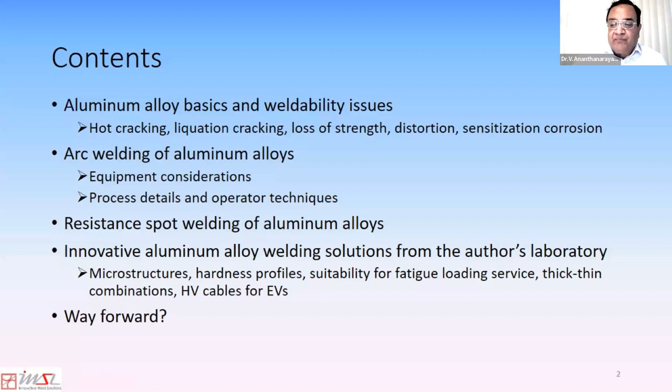So coming to aluminum alloy basics - aluminum alloys are grouped under 8 different alloy groups, and usually they are designated by a 4-digit alloy group number. Alloy groups with 1XXX are unalloyed aluminum with greater than 99% purity.

2000 series alloys have copper as the main alloying element, and they are heat treatable to high strengths. The 2000 series alloys are mainly used by the aerospace industry. 3000 series alloys have manganese as the main alloying element. 4000 series alloys are used mainly as filler material and have a fair amount of silicon in them that makes them low melting.

5000 series alloys have magnesium as the main alloying element. They're used extensively in the manufacture of aluminum boats and ships that go into the sea, since the alloys have good marine corrosion resistance except at the weld areas.

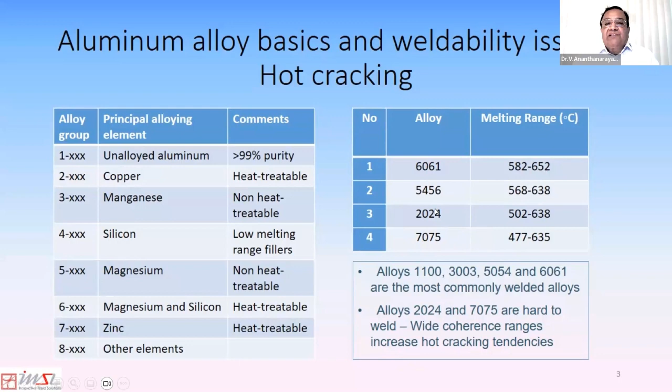And the higher the coherence range, the higher the tendency for hot cracking of a weld metal as it solidifies. That's one of the main reasons why these two alloys are not considered weldable.

If you look at efforts to spot weld these alloys using conventional methods that are used in the manufacture of, say, the Ford F-150 aluminum body, you can see that the 5000 series and 6000 series alloys give you very good buttons in a peel test of spot welded aluminum, whereas 7075 gives you some questionable buttons, and the breaks are mainly in the sheet metal.

And with a 2024 alloy sheet, you cannot even get a good peel test done. The separation is entirely along the interfacial interface of the weld. So this shows the effect of the coherence range on the weldability of these alloys and why folks don't like to spot weld the 7000 and 2000 series alloys.

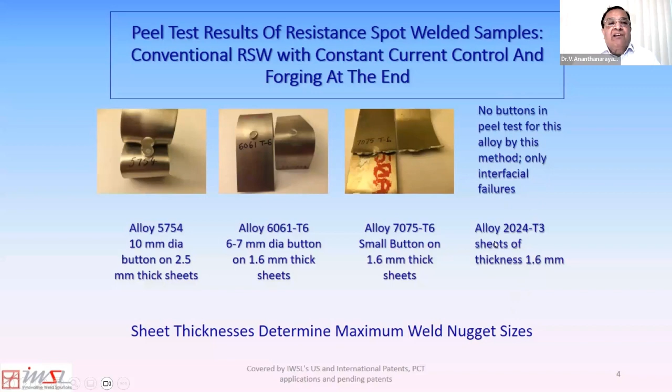Another problem with aluminum alloys is liquation cracking, which is the partial melting of a second phase in the heat affected zone of the alloy. And it's not tramp elements in the material that make this cracking happen, but alloying elements such as copper, silicon, and magnesium that are added in the alloy.

I will show you some micrographs later that show second phases of this alloy in the heat affected zone that melt during welding and cause this liquation cracking. Phases such as Mg2Si and Al6CuMg4 and other phases are the sources of such liquation cracking.

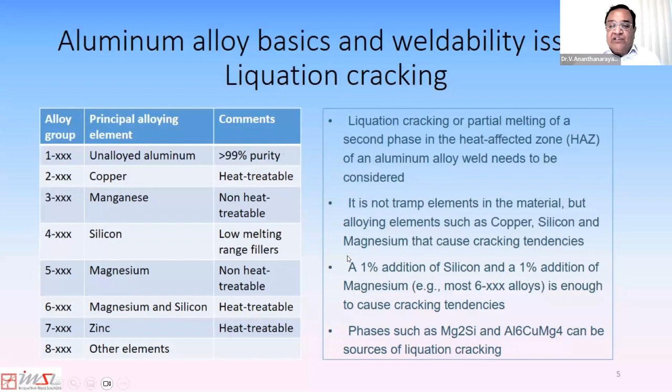What I show here is a micrograph of a resistance spot weld of a 5000 series alloy, where these magnesium-rich second phases have cracked due to the welding heat. They have actually melted and cracked during the welding and post-weld cooling operations.

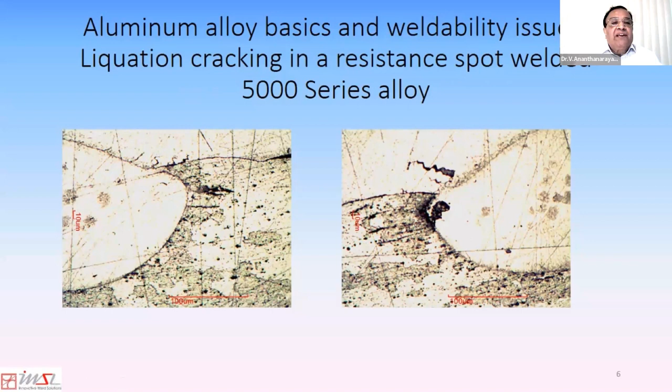So this kind of crack obviously makes the structure not suitable for service, and it's a problem when you weld these alloys which have second phases that can cause such heat affected zone liquation cracking.

Some of the potential solutions for this liquation cracking: if you are doing arc welding, you can use filler metal containing 5% or more magnesium that lowers the melting temperature of the filler metal and allows it to provide a feeder for already solidified regions, so they solidify without cracking.

Also, fillers with grain refiners such as zirconium can help as well. Edge preparation and root gap can also be done in such a way that sufficient filler metal feeding is enabled during the cooling of the weld post-welding. So these are some of the techniques folks use while trying to address this liquation cracking issue, but none of these work very well if you are spot welding this alloy, or if you're trying to resistance seam weld this alloy using conventional methods.

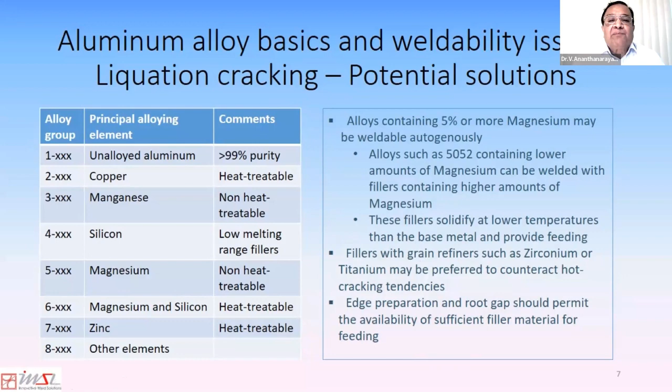The aluminum alloys also are subject to sensitization corrosion, particularly the 5000 series alloys, which happens due to the precipitation of magnesium aluminides in the heat affected zone parallel to the weld edge. There is a temperature range in the heat affected zone that is favorable for the formation of these magnesium aluminides parallel to the weld edge.

This is very similar to the intergranular corrosion of stainless steels that some of you may be familiar with, where the heat affected zone of a stainless steel, if it has higher carbon contents, or if the heat input is very large, tends to become susceptible to corrosion in the heat affected zone. So this is somewhat similar, and folks use low heat input and cooling of the heat affected zone.

But this is a serious problem in the welding of aluminum boats and ships that go into the sea. I have known some aluminum ships that go into the sea, come back to the dock every 2 or 3 years, just to gouge out these sensitization corroded lengths parallel to the weld, and then deposit new weld metal and go back to the sea.

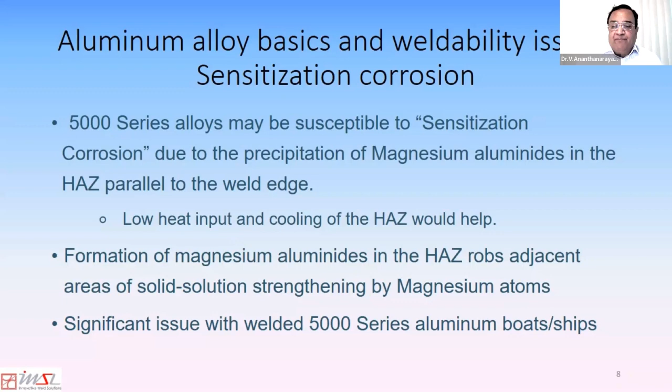Other issues with aluminum alloy weldability are a 50 to 70% loss of strength in the weld and heat affected zone areas. And if you weld a 6000 series alloy like 6061 T6, a 50 to 70% loss of strength in the heat affected zone is not uncommon.

And this is why the aluminum alloy structures have not gained widespread use in structural applications that involve cyclic loading and other heavy stressed mechanical loading applications. The loss of strength occurs even in non-heat treatable 5000 series alloys, as I mentioned. So the recovery, recrystallization, and grain growth rob strengthening effects from cold work as well.

And what can one do here? One can tack weld more to help with the distortions and assemble compressive stress if possible, so that the residual stresses are not so adversely affecting the application, and only make welds that are as big as needed, no bigger. If there's a thought process that larger welds can hold more load, that is a completely wrong idea with respect to aluminum.

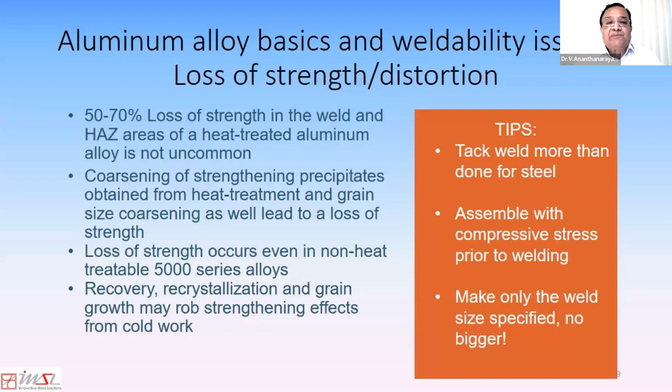Now I'll talk a little bit about the arc welding of aluminum alloys, and mention at the end of this talk some of the things we did while welding a door panel for an automotive application, the door panel made of aluminum. Initially, I'll just introduce some of the techniques used in the arc welding of aluminum.

All arc welders for aluminum need push-pull feeders because the alloy wires are soft. You cannot just push the wire into the weld gun conduit like you push a steel wire. You need a push-pull feeder, and the feeders are very close to the contact tip in these guns. And the conduits are also made of Teflon. So it's very necessary to keep the conduits in a smooth circle and not step on them, and handle these welding conduits and welding setups very gently when you're welding aluminum.

Secondly, the welding current waveforms and polarities play a significant role in both gas metal arc welding and gas tungsten arc welding of aluminum. And as you all know, aluminum has a very high affinity for oxygen.

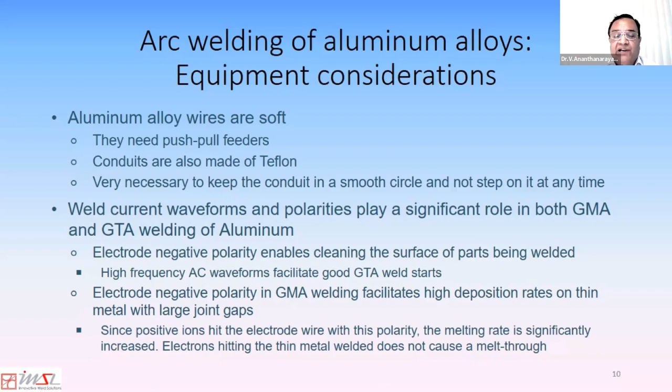So to understand the effects of these waveforms in aluminum alloy welding is very important. If you look at TIG welding, you can have balanced AC sine wave technologies at 60 hertz here, or in India, 50 hertz. The positive half cycle is cleaning, the negative half cycle is penetration. So with AC square wave technology, you can have more cleaning or more penetration as your joint geometry dictates.

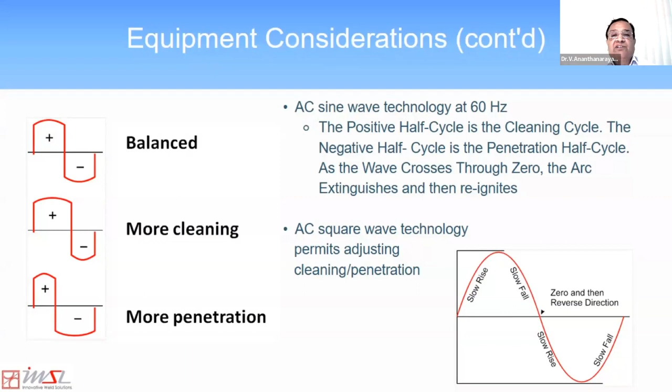Some of the arc welding waveforms are shown here. I'm not trying to recommend one manufacturer of weld equipment versus another. Many manufacturers like Lincoln and Hobart and others also have their own special waveforms for welding aluminum. What they commonly do is superimpose low frequency and high frequency pulses.

Current pulses are shown here. These are high current amplitude and low current amplitude pulses, with penetration and wetting occurring during the high current pulses and solidification during the low current pulses. Why do we need this?

One of the reasons is that aluminum is a very conducting metal. If you keep welding at a current that melts the initial start of the weld, by the time you travel a certain distance, the weld and the metal get too hot. There is a need to cycle low and high currents like this to maintain a constant weld width. You can adjust the duration of these depending on your part material thickness combination and joint geometry to get an acceptable weld bead that has uniform wetting and penetration along the length.

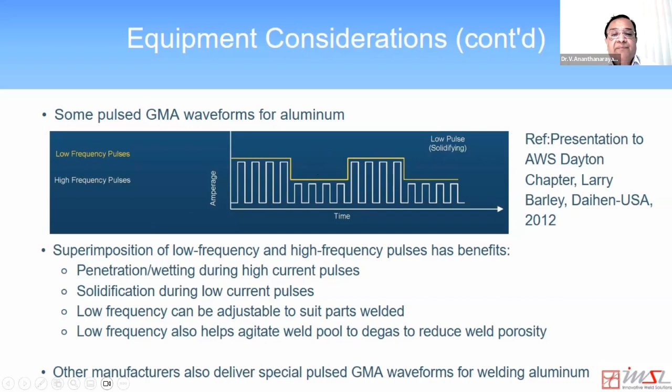This kind of imposition of low current and high current pulses is also done in the AC mode. It permits high deposition rates and is designed to weld thin metal with or without large joint gaps. Again, my apologies for this error here - it's not low frequency, it is low amplitude or low current. Many gas metal arc welding power supplies for aluminum permit changing weld schedules and weld current along the length as well.

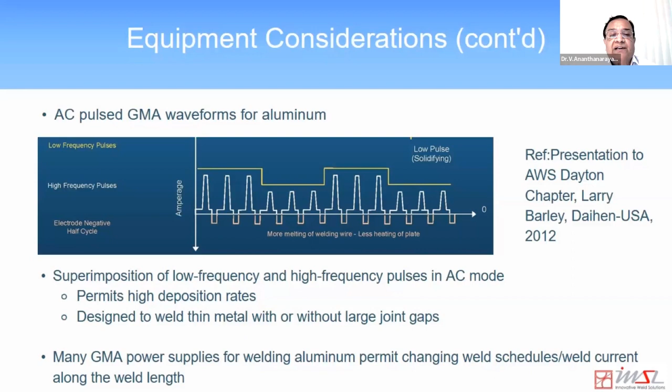Filler metal selection depends on the grades welded and is mainly intended to provide low freezing range filler that melts at low temperatures, such as silicon-rich fillers, which are 4000 series alloys. The melting range of the filler should be close to the solidus of the alloy welded.

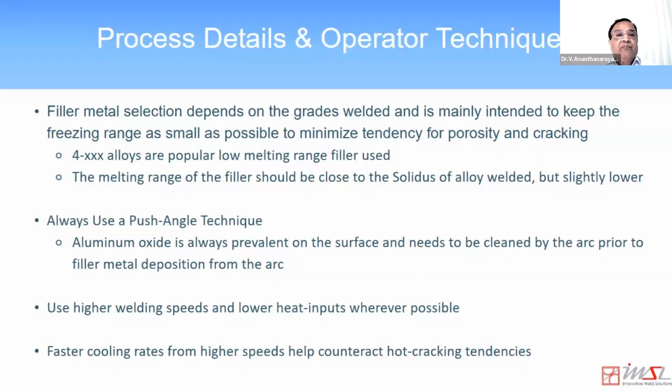While welding aluminum, it is always necessary to use a push angle technique. A pull angle technique does not work with aluminum because of the oxide issue I talked about. There is a need for the plasma to clean the metal ahead of the arc as you proceed. So a push angle is always essential, whether you do gas tungsten arc welding or gas metal arc welding, and use higher welding speeds and lower heat inputs wherever possible. Faster cooling rates from higher speeds help counteract hot cracking tendencies as well. I show the push angle here that is commonly done with MIG or TIG welding of aluminum.

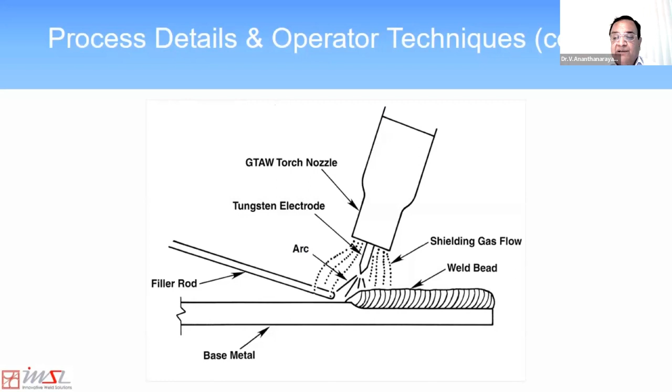Shielding gases for welding aluminum are either pure argon or argon-helium mixtures. The addition of helium causes the arc voltage to rise, the arc to become hotter, and the weld bead to become a little bit wider.

The heat flow in aluminum is very different from that in steel. One technique I have seen folks do, such as those who weld aluminum gasoline tankers in Tennessee, is they do the welding manually, not using a robot. As they travel along the weld length, they maintain the same push angle and the same travel speed with their hands, but their hands go up and down as they go along the weld. When they go down, they get penetration, and when they come up, they get cleaning and good fusion, good wetting. They keep doing this with a good cycle, and they're all trained and certified to provide good fusion and penetration. They are checked frequently by sectioning checks and also by bend testing, as you know.

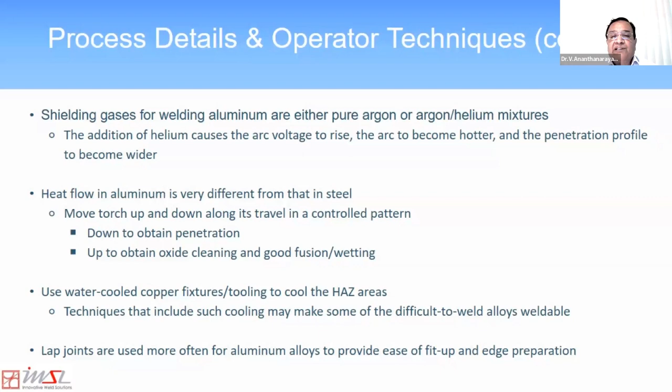Lap joints are more often used with welding aluminum alloys to provide ease of fit up and edge preparation.

Pre-weld cleaning of aluminum alloys is essential to avoid porosity in the weld. As I mentioned, it's not a good idea to store aluminum alloy parts to be welded in open atmosphere close to a rainy area, for instance. The oxide layer, as I mentioned, has much affinity for moisture.

The gasoline tanker welders in Tennessee that I mentioned always get their sheets to be welded with protective covering, somewhat sticky covering that doesn't leave any residue on the metal when removed. It's removed just prior to welding, and then they weld it, and then they remove another covering about a couple of feet from the weld, so the covering doesn't get hot.

It's essential to also send the shielding gas for aluminum arc welding through a drying bulb to avoid porosity. If you have water content in your shielding gas, you are sure to get quite a bit of porosity in the weld. This was one of the problems I helped solve using the simple use of a drying bulb when they were trying to weld aluminum landing strips for aircraft for use in the Iraqi desert a couple of decades ago.

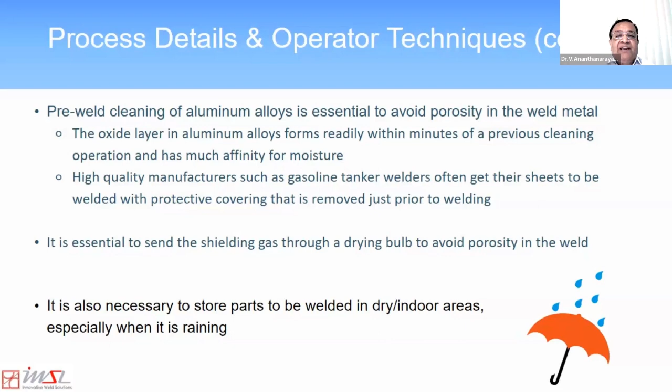It's necessary to store the parts to be welded in dry indoor areas, especially when it's raining. I'm repeating this since I know Mumbai has quite a few of these rainy areas.

Weaving techniques also need to consider thermal conductivity of the alloys. The nozzle is rotated to do the weaving sometimes.

One of the problems with welding aluminum is the weld tends to bubble up. The bubbles are mostly due to hydrogen dissolved in molten aluminum, and oils in the weld interface from parts stored in a moist atmosphere. The oxide layer in the cut surface causes these moisture contents, along with the shielding gas. Cleaning these up usually helps, so weld as soon as possible after cleaning, keep brushes dry and oil-free, keep welding gun nozzles clean, and reduce the stick out.

The stick out in aluminum welding does not change weld bead profiles as severely as stick outs in steel welding, because when the stick out in steel or stainless steel welding changes, the heat generated along the wire after it exits the contact tip changes significantly. With aluminum, that heat generation change is not very high, but it's still a good idea to have low stick out so you don't get moisture infringement from outside, and so the shielding gas coverage is good.

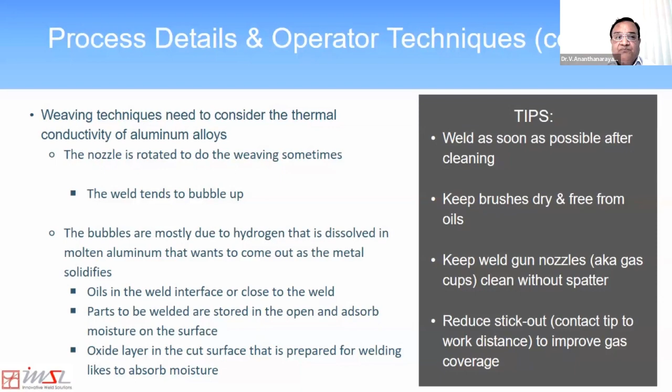If your MIG welds with aluminum end up bouncing the wire without an arc strike, try cutting the wire tip and cleaning the start of the area. This was found to be very necessary when...

We were welding aluminum door panels for an automotive application. We didn't have to cut the wire tip there. The aluminum arc welding power supplies have a way of finishing the previous weld while leaving the tip of the wire very sharp.

In all cases, use the wire sharpening feature in the arc weld power supply effectively so the wire tip is sharp for the next start. Also make sure you don't have too many starts and stops while welding any sheet metal structure. If possible, make welds continuous, or adjust the welds so the heat from one weld doesn't oxidize the start of another.

Also use a high run-in wire speed initially at the weld so that you get good weld starts before the regular wire feed speed kicks in.

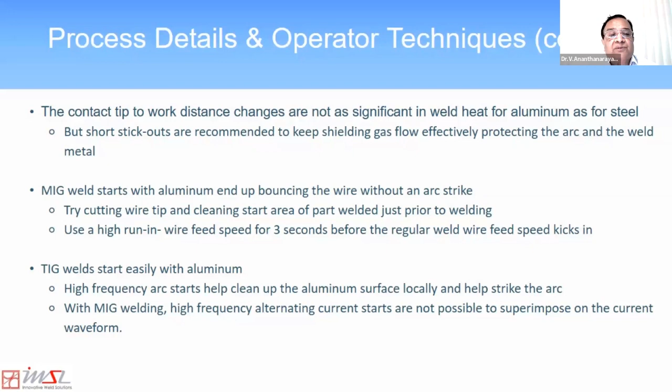When doing TIG welding of aluminum, high frequency arc starts help clean up the aluminum surface locally and help strike the arc well. With MIG welding, high frequency alternating current starts are not possible to superimpose on the waveform.

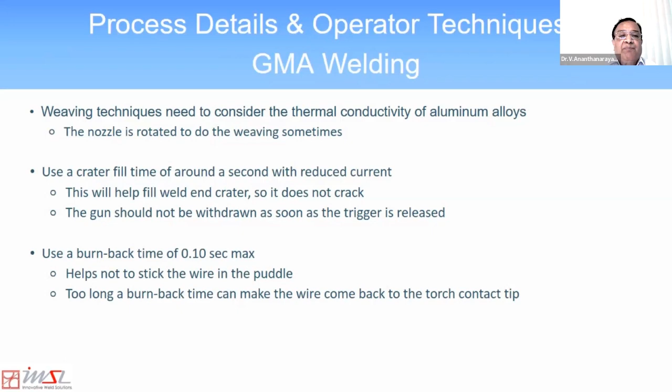You can use a crater fill time of around a second with reduced current. This helps fill the weld crater so it doesn't crack, and the gun should not be withdrawn as soon as the trigger is released. A burn back time of about 0.10 seconds max will help make sure the wire tip ends in a sharp configuration and doesn't stick to the contact tip when the burn back time finishes.

When you do gas tungsten arc welding, the operator has hand control of the welding current and needs to reduce it as the end of the plates is reached, since they are hotter. If the welding is automated, the current needs to be reduced with travel distance. At the end of the weld, lower the current and feed more filler wire to make a good crater. Sufficient pre-gas flow and post-gas flow should both be optimized.

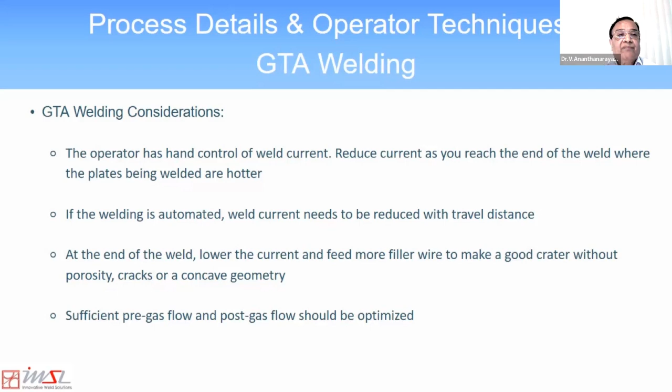I've already talked about the weld bubbling up. I will now talk about some solutions for these problems developed in my laboratory, which involved focusing weld current at the intended weld nugget region.

Such focusing methods also permitted cooling of the heat affected zone with water-cooled copper, using large water-cooled copper alloy electrodes not commonly used in resistance welding. They use low melting filler metal between high coherence range materials we discussed, like the 2000 series and 7000 series alloys, where we didn't even get good buttons in a peel test, as shown in earlier photographs. This focused melt resistance welding also helps manipulate temperature profiles.

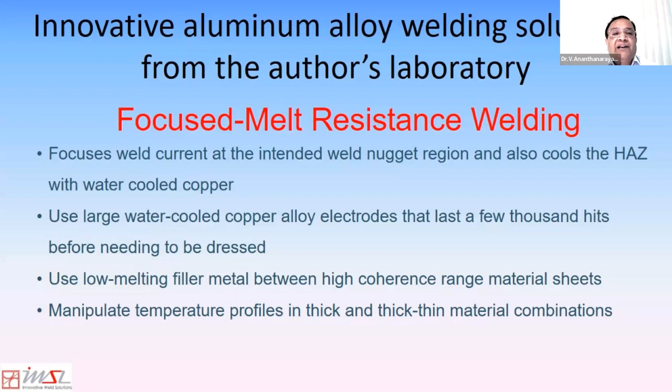This talk is not meant to describe this method in detail. If needed, I'm ready to make another presentation of about an hour or so showing tooling, electrodes, parts welded, and so on. This is just meant to give a flavor for some of the parts welded and some of the solutions developed using this methodology.

For instance, here we are resistance spot welding two aluminum alloy plates, each 6.25 millimeters thick. Normally one would not even attempt to resistance spot weld these plates. If you see the copper alloy electrodes I'm talking about, you can see how large they are and how they cool the heat affected zone during welding.

These large electrodes have low electrode wear and last a few thousand hits between redressing operations. If you're spot welding aluminum in an automotive factory, it's hard to get more than 60 or 70 hits between redressing operations for the electrode tips, so a few thousand hits is almost unheard of. This focused melt resistance welding permits spot welding of thick and thin metals with very high electrode life, and there is no dust or spatter from the electrode metal interface.

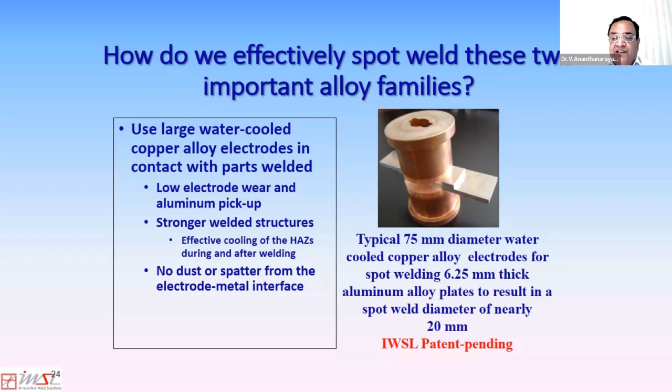When you cool the heat affected zone, some of the non-weldable aerospace grade alloys become very weldable. As you see here, the alloys 7075 and 2024 T3 have very good buttons and good microstructures as well. Due to a lack of time, I'm not going to show microstructures of these alloys.

What is also important about this focused melt resistance welding is that the diameter of the weld in all these cases is the same, a 10 millimeter diameter button, but the thickness of the sheets welded is not the same. The 5000 series alloy has 2.5 millimeter thick sheets welded, and the 6061 alloy has 1.6 millimeter thick sheets welded, and they both have the same button diameter.

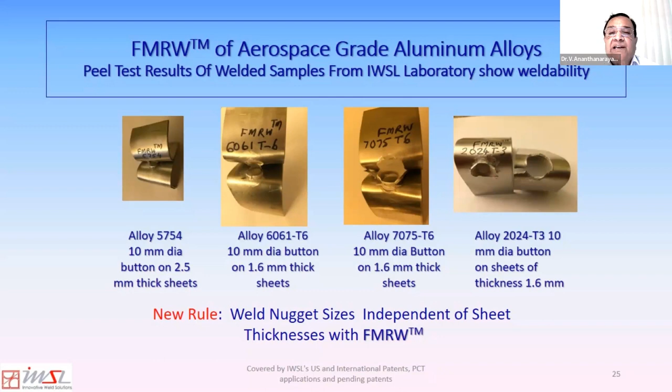So the focused melt resistance welding method allows you to select the weld size irrespective of the sheet metal thickness, and that way you can also select the weld strength of a particular spot weld as well.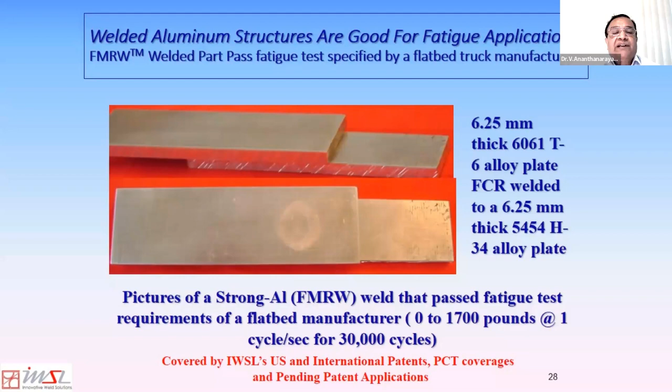When you cool the heat-affected zone using water-cooled copper alloy electrodes, you see that the second phases in the heat-affected zone do not melt and crack anymore because they are kept cooler by the water-cooled copper alloy electrode. The separation between the weld interface here is due to peel testing - the lower side was pulled apart in an effort to do a peel test, and in this case the materials did not come apart. Cooling of the heat affected zone helps you counter liquation cracking as well.

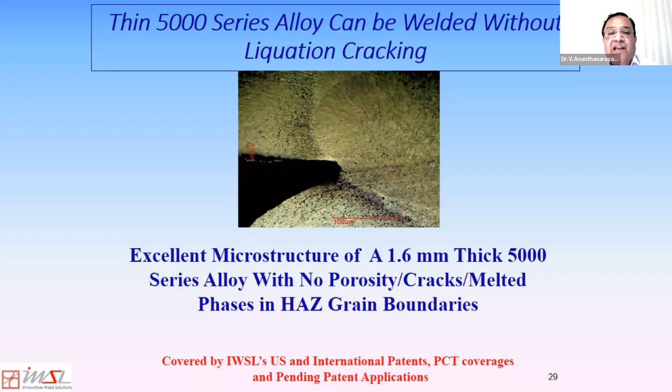The point I'm making here is that these cables would be very useful for a potential large volume industry like electric vehicles, which are presently using only copper cables, which are both heavier by a factor of 3 or so, and more expensive by a factor of 10 or so, in connecting the electric vehicle motor to the battery and the inverter to the battery and so on. Potential savings of, say, a school bus construction in just the cable material costs would exceed $1,000. These savings are not being realized only because the welding of these cables to these connectors has not been possible effectively so far. I believe that paradigm has changed, and hopefully this will see commercial implementation sometime soon.

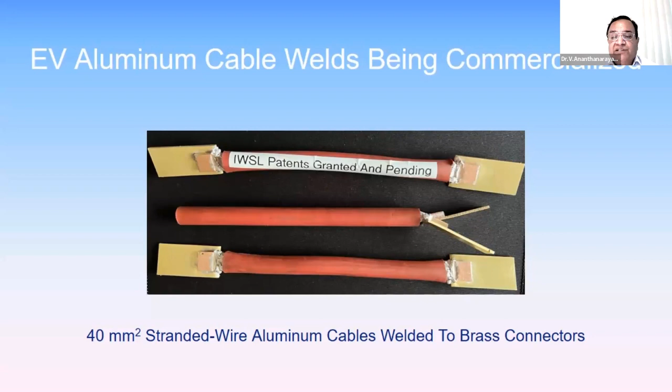I'm not sure whether I delivered the intended talk to all of you, but I have tried to talk about aluminum alloy basics and issues with weldability with respect to coherent ranges, hot cracking, liquation cracking, some distortions, loss of strength, were all presented with some potential solutions.

Arc welding techniques and equipment considerations were discussed in detail. And some work from my laboratory, which I believe are innovative, were presented with examples. They helped counteract some of these issues, like liquation cracking and applicability to cyclic loading particularly.

I believe that the present engineering and industry approach to the welding and use of aluminum structures is badly outdated. They have not exploited the potential of cooling heat-affected zones with water-cooled copper nearly enough. They're all married to old, outdated teachings and handbooks and methodologies and design manuals, and are refusing to come out of those. There is a need for this aluminum industry to wake up and smell the coffee.

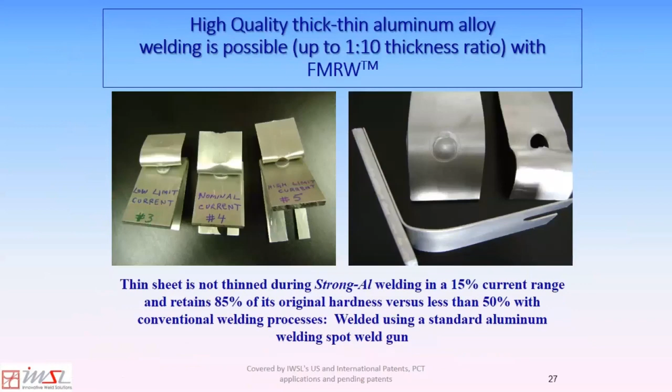My slide 29 shows the thickness of the base metal was 1.6 millimeters.

Is coherent range associated with two metal alloys? No, not really. It is the range of one alloy. It is the difference between the solidus temperature and the liquidus temperature of the same alloy. The liquidus temperature is the one above which the material is completely liquid. The solidus temperature is the one below which the material is completely solid.

How many times can we make repair of weld joints? I have answered this already.

What's the composition of black soot found often on MIG welds of aluminum? I'm sorry, I have to look this up. I can send some emails on these.

Can aluminum alloys and stainless steel be welded using electron beam welding? Stainless steels, yes, I have welded stainless steels using electron beam welding, no problem there. I don't see a problem in welding aluminum alloys with electron beam as well. It's a matter of how the electrons are being absorbed. Aluminum is a very conducting metal, so I don't see a problem in the electrons being absorbed and being grounded. I don't see a metallurgical problem either, so I think the answer is yes. Both of them can be electron beam welded, both aluminum alloys and stainless steels.